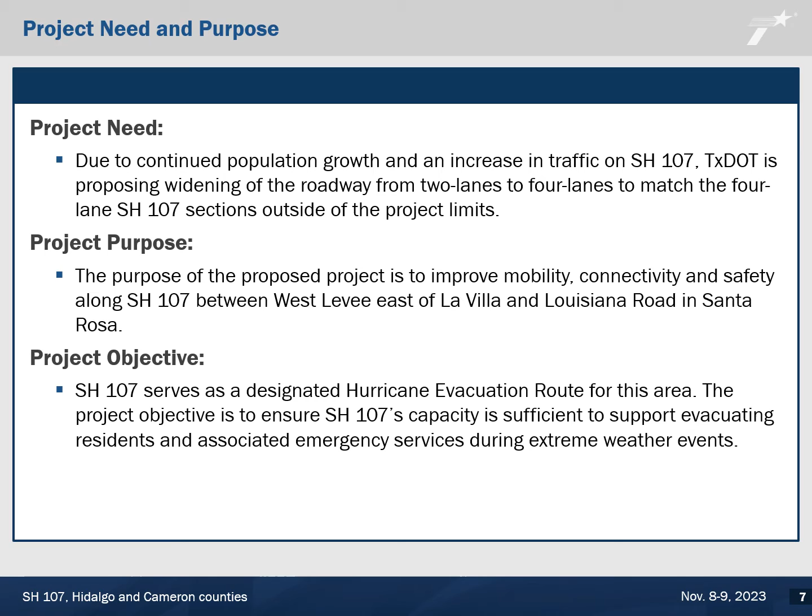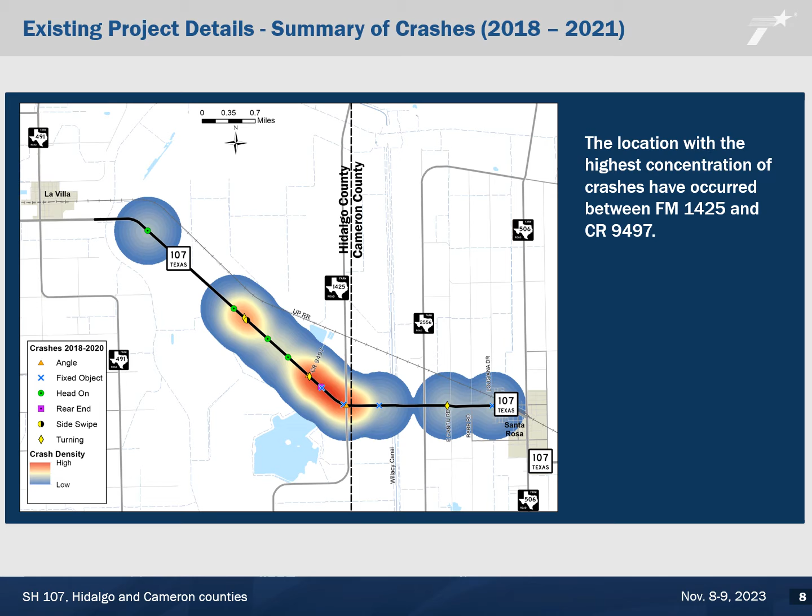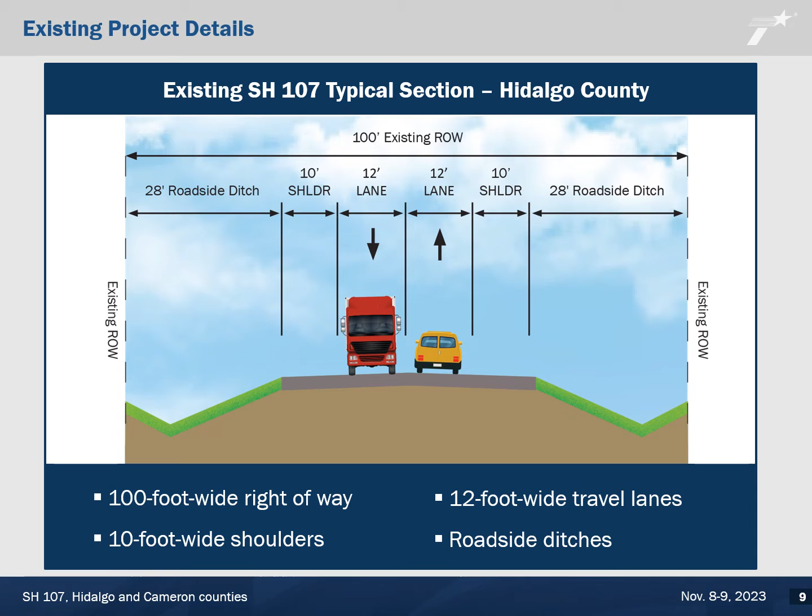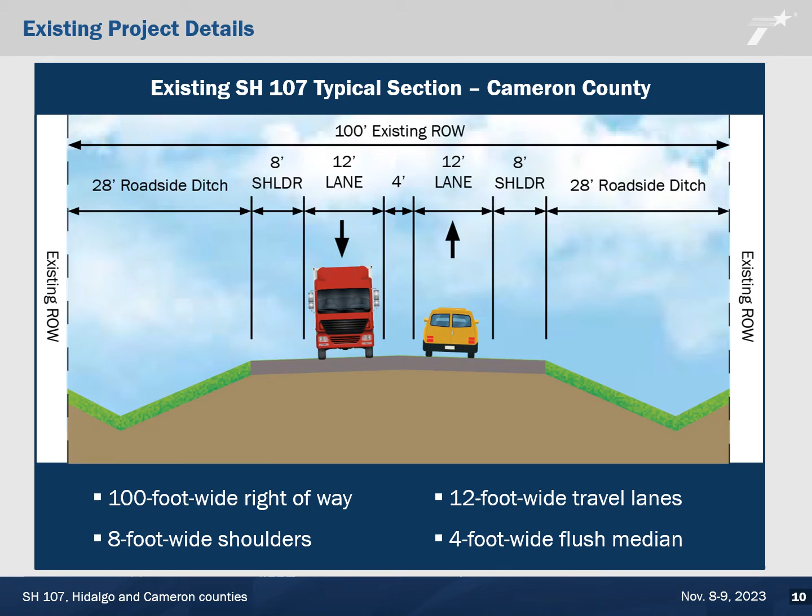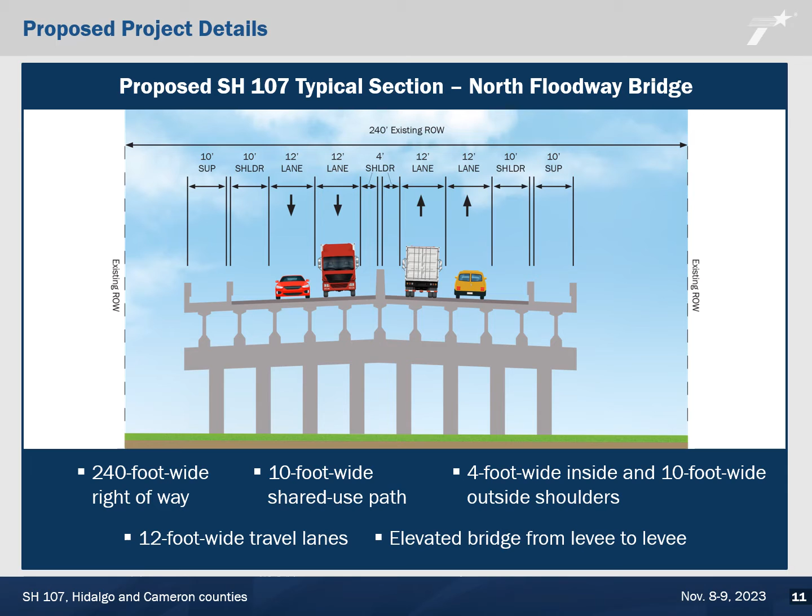The proposed State Highway 107 project typical section for the North Floodway Bridge in Hidalgo County is designed within a 240-foot wide right-of-way with 2 12-foot wide travel lanes and 4-foot wide inside and 10-foot wide outside shoulders in each direction, spanning the entire floodway from levee to levee. Although this proposed project does not include a shared use path, the bridge would include a 10-foot wide shared use path in each direction to accommodate potential future expansion of pedestrian facilities along State Highway 107.

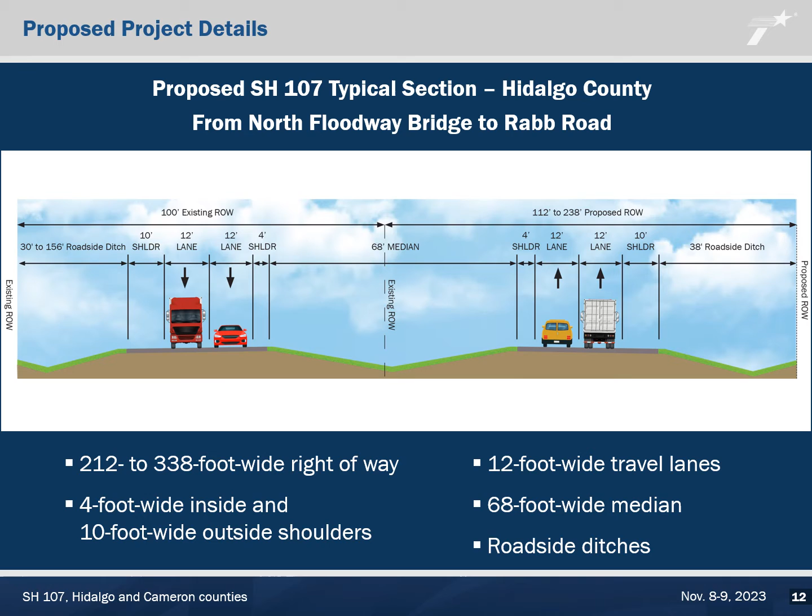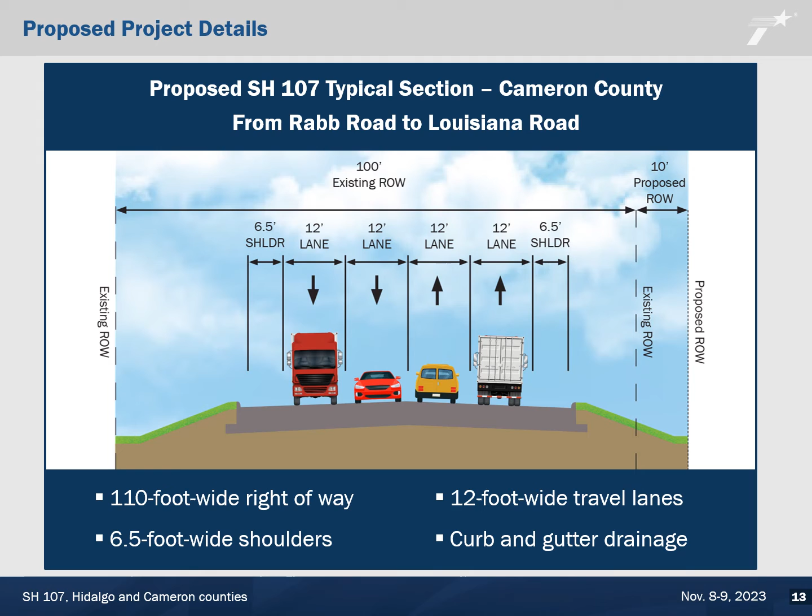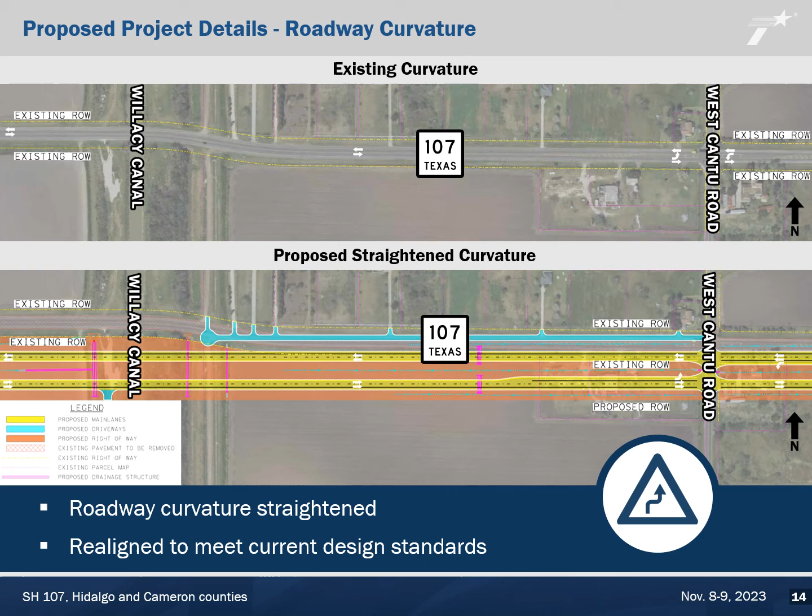The proposed State Highway 107 design would straighten the roadway curvature between FM 1425 and Louisiana Road by realigning the roadway to meet current design standards.

The intersection of State Highway 107 at FM 1425 is proposed to be realigned 45 feet south of the existing intersection to accommodate the straightening of the roadway curvature along the project corridor. This intersection would maintain the stop sign and flashing red traffic signal for FM 1425 through traffic. State Highway 107 would maintain the flashing yellow traffic signal.

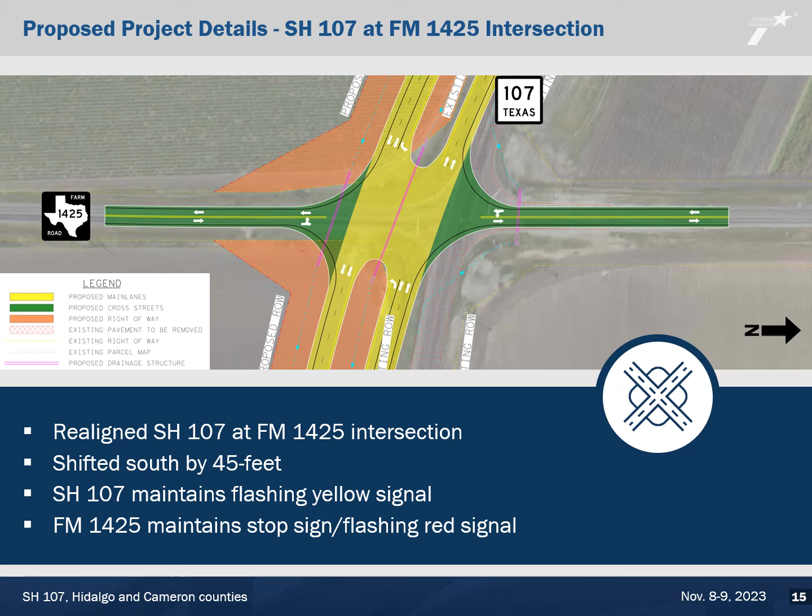The proposed project is anticipated to be programmed with both state and federal funds. Because of this, TxDOT is required to assess the potential environmental effects of the proposed project in accordance with federal standards. The process that is followed is called the National Environmental Policy Act process, otherwise known as NEPA. The NEPA process provides analysis of the potential impacts to the natural and man-made environment and helps the decision maker to make an informed decision on whether to proceed with the project.

On December 9, 2019, TxDOT received a signed Memorandum of Understanding from the Federal Highway Administration that permits TxDOT to assume responsibility from the Federal Highway Administration for reviewing and approving certain assigned NEPA projects. This review and approval process applies to this project.

The NEPA process requires analysis of potential impacts to the man-made and natural environment as a result of the proposed project. As part of the environmental process, technical analyses are being prepared to document the potential environmental impacts of the project. The resource categories studied include cultural resources, including historical and archaeological resources, hazardous materials, traffic noise, community resources, including environmental justice populations,

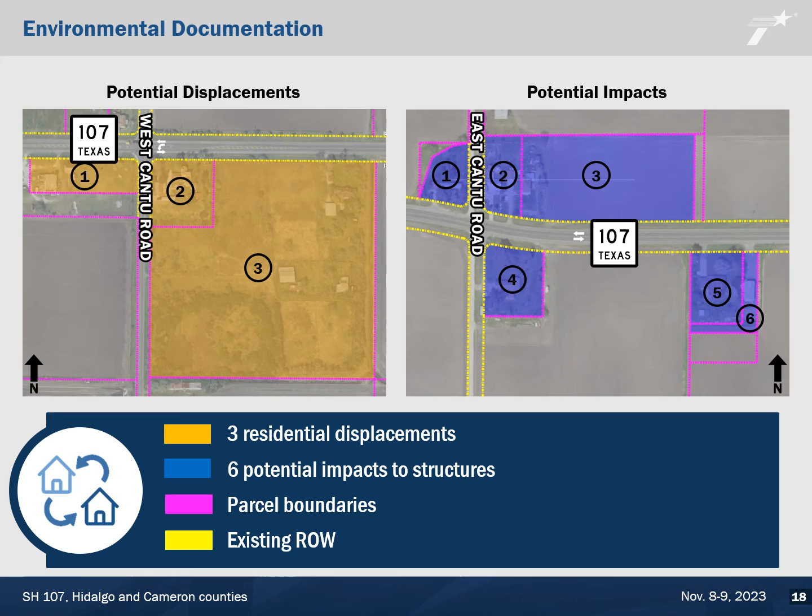As part of the proposed State Highway 107 design, additional right-of-way would be required. Most of the right-of-way needed for the proposed project is existing farmland and would include 3 potential residential displacements, as well as potential impacts to 6 structures.

The right-of-way acquisition process would follow federal and state laws and policies. The Uniform Relocation Assistance and Real Property Acquisition Policies Act of 1970, known as the Uniform Act, is the federal law that is followed for appraisals, negotiations, and relocation of families and/or businesses. Hard copies of the right-of-way brochures and property owners' Bill of Rights will be available at the right-of-way table at the in-person public meeting and are also available online.

TxDOT.gov - TxDOT is the agency responsible for acquiring the additional right-of-way from the individual property owners for this project. TxDOT will ensure that the local public agency acquires all real property in accordance with the provisions of Title III of the Uniform Act and its associated federal regulations, 49 CFR Part 24. All negotiations for right-of-way conducted are subject to this law and these regulations.

Relocation booklets, which provide a general overview of the Relocation Assistance Program and outline the services offered and any payments for which displaced individuals, families, businesses, and nonprofit organizations may be eligible to receive, are available for download on the TxDOT website. Information about the benefits, services, and right-of-way acquisition schedule can be obtained by calling the TxDOT District Office.